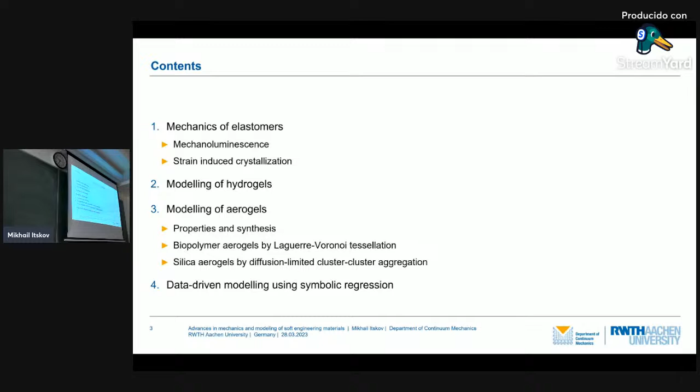The first topic is driven by my former PhD student, now postdoc, Khiêm Vu. First we would like to discuss the motivation for this topic, and the model we will discuss with you is physically based.

That's why we will start with the statistical, molecular foundation of rubber elasticity. Then we will see how we can go from the micro level to the macro level, and then we will look at some examples in rubber elasticity, the Mullins effect—very important for rubbers—and mechanoluminescence.

Here you see a typical stress-strain response of rubbers. There is a huge difference between first loading and second loading. This difference is exactly what we call the Mullins effect. This difference between loading and unloading is called hysteresis.

This is another important, interesting effect in rubbers, the Mullins effect, because if you look at the tangent line, the very first loading and the second loading differ very strongly. With the third load, the material becomes softer and softer with each next loading. This should be taken into account in the constitutive model.

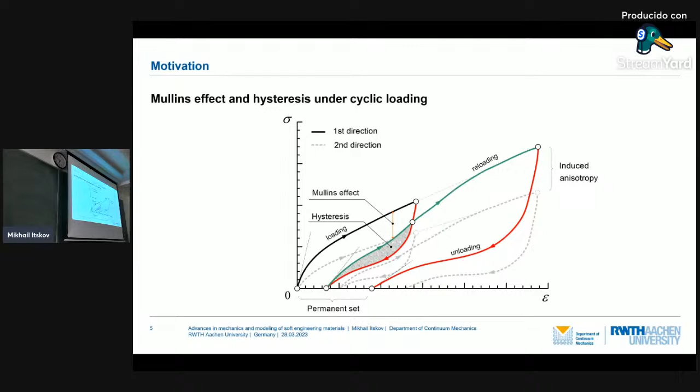Another important and difficult effect: if I change the direction of loading of rubber, load it, and change the direction, the response becomes softer. That means it is induced anisotropy. If you take a piece of rubber in your hand and apply a little load, it is already anisotropic after we go into first loading.

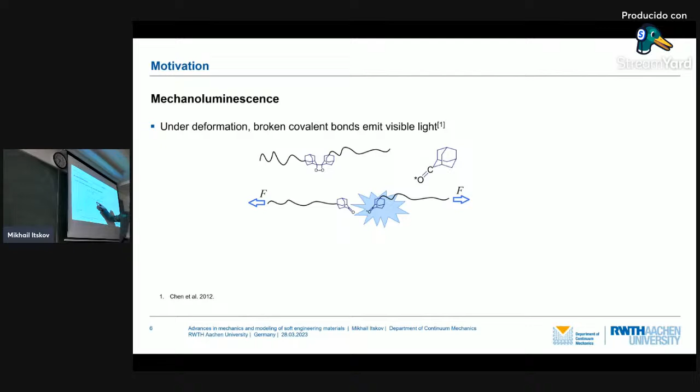We will also speak about mechanoluminescence in this context. Another important effect: if you add so-called dioxetane molecules to rubber, under loading these molecules break, and this breakage emits visible light. You see this piece of rubber which, under loading, begins to emit light. This way we can see how much damage is inside the rubber.

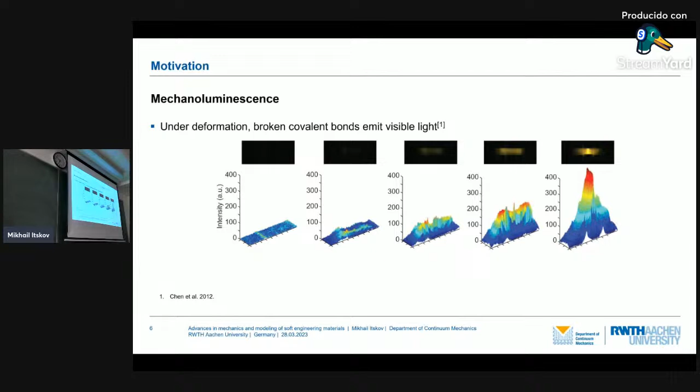Rubber parts are usually very cheap, O-rings for example, but if one breaks inside a motor or something else, the damage can be huge and very expensive. So this is the application of this effect. There are already many applications in dynamics, some optoelectronic, biomedical, luminescence devices, and so on. This is what we are going to discuss in this context.

I begin very shortly with the molecular statistical foundation. Here you see a typical polymer chain consisting of n segments, each of length L, and we work with the so-called freely joined chain model. It's like a chain which can rotate arbitrarily, also called phantom-like because it can cross itself, which is unphysical, but this model works very well.

We specify some direction, and this is the angle theta between the end-to-end direction of this chain and that direction. We also introduce the so-called relative end-to-end distance, which is the relation of this distance r to the length of one segment.

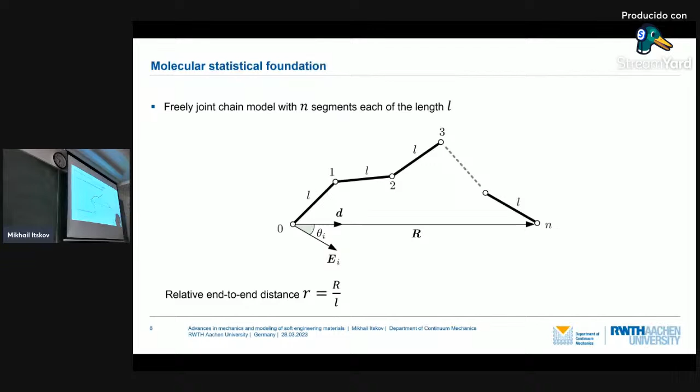According to the classical theory of this chain, the statistical distribution of this relative end-to-end distance depends on the number of segments, and it describes a very complex function, which is also discrete—it depends on the integer value—very difficult to use.

And here for longer chains, 24, 32, you also see with increasing end-to-end distance, this probability tends to 0, which is clear because if you try to extend this chain to the straight state, the probability is very, very low, almost 0, because the energy needed to reach that state is almost infinite, right? That is why it is described in this way.

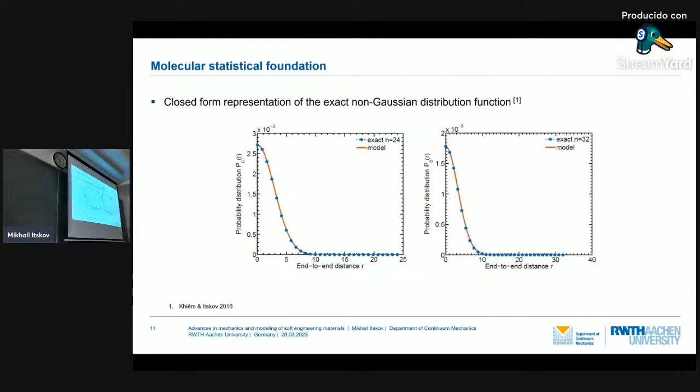Another problem is that such a chain is not alone. It is surrounded by other chains in a polymer or rubber, and this is taken into account by the so-called tube model. There is an additional probability function here, and we introduce according to this micro-stretch and micro-tube contraction. Here it is exactly the relation between this reference diameter of such an imaginary tube and the final diameter.

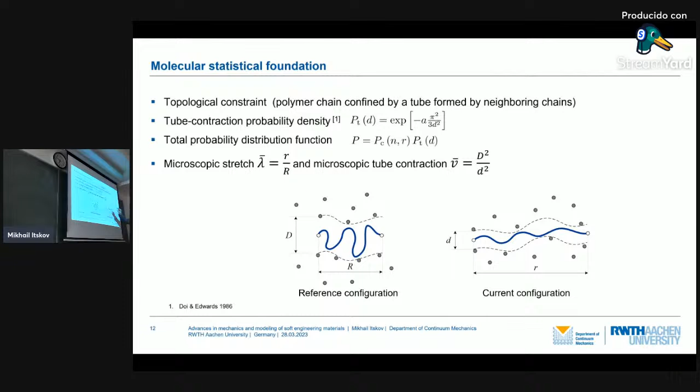And what to do with this probability? It appears here if we calculate the entropy of the system, which appears in the Helmholtz free energy. You see here, if we take this logarithm of this number of states, then from the product of these two probabilities we get the sum of these energies, and we see this entropic energy of the chain and this topological contribution.

Now the next question was how to come from this micro to macro level, and here we use the so-called analytical network averaging concept, which is based mostly on this known von Mises-Fisher distribution.

This is very nice because it's based on the exponential function. We see here again this angle between this direction and the preferred direction, and we can have many terms depending on the anisotropy of the material. For isotropy it's enough to have only 3 terms, and this zeta I is the concentration parameter for the distribution. If that is 0, it is isotropic.

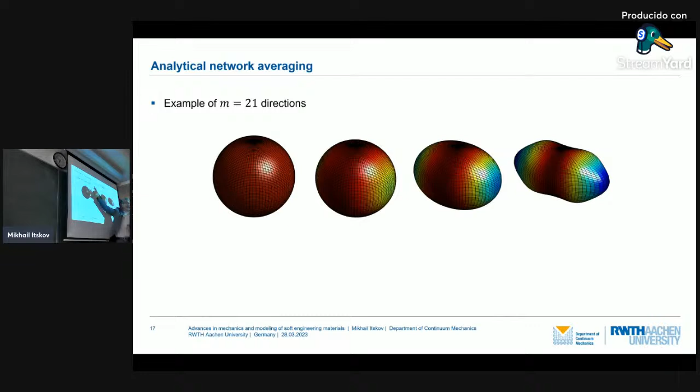It can be illustrated by a sphere, and with increasing concentration it becomes more and more anisotropic. You see here this distribution for only one direction, and here more complex for 21 directions, right? So any anisotropy can be described in this way, and the nice thing is it's based on exponential.

If integrated over all directions, you see we can express everything analytically in terms of the first here and second invariant of the right Cauchy-Green tensor. I hope you are familiar with this.

And Wi is this number of chains in this direction that can be expressed directly in terms of the concentration parameter. In the special case of isotropy, we have this classical relation where stretch is the square root of the first invariant divided by 3, and this tube contraction also can be expressed in terms of the second invariant, right? Let us look at the applications to rubber elasticity, for example.

There's this expression of the strain energy function in this case. We have two terms in everything. We have this shear modulus, so these two are parameters. We have another parameter, the average number of chains, as I mentioned already, and additionally we have here this stretch amplification exponent. So we have all four material constants.

And you see here we compare our model with this classical Treloar data and Kawabata data. In this Kawabata experiment, biaxial tension was applied with different relations between stretches, so in two directions we see different behavior. Using only these four material constants, we can nicely describe simultaneously these two experimental data sets very nicely, right?

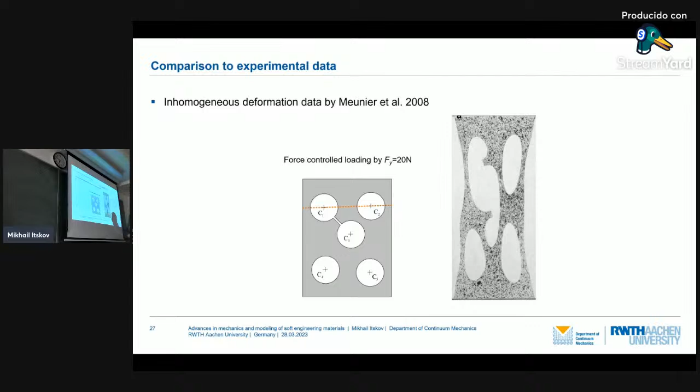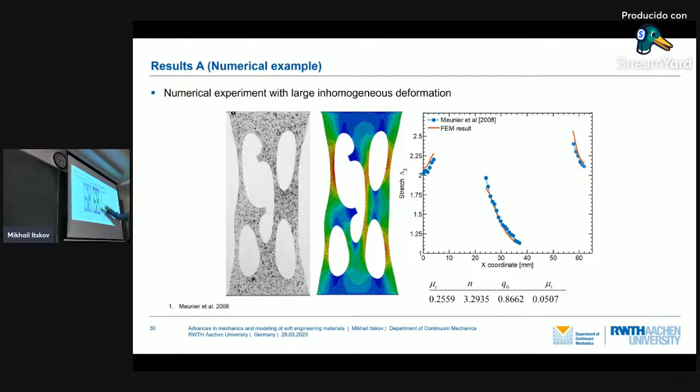Another example is an inhomogeneous case: a plate with five holes subjected to tension. Along this line, displacements were measured, and we fitted our model to this experimental data, for example the stress-strain curve under uniaxial and biaxial tension. Also shown here are constraint tension and constraint compression, and the agreement is very good even for this inhomogeneity. The displacements are also very well described along this line.

Let me now focus on the Mullins effect.

To describe these effects, we consider a network of polymer chains with aggregates inside, and decompose this network into parts. In the first part, we have chains which break - for example, in the case of dioxetane, they emit light, or simply detach from these aggregates once and forever.

In the second network, we consider hysteresis - these chains can attach again after unloading. We see here once more these effects illustrated.

Here we see again the dioxetane molecules which emit light when broken. And here you see: if the distance between the two aggregates becomes longer than the contour length of this molecule, there is a gap.

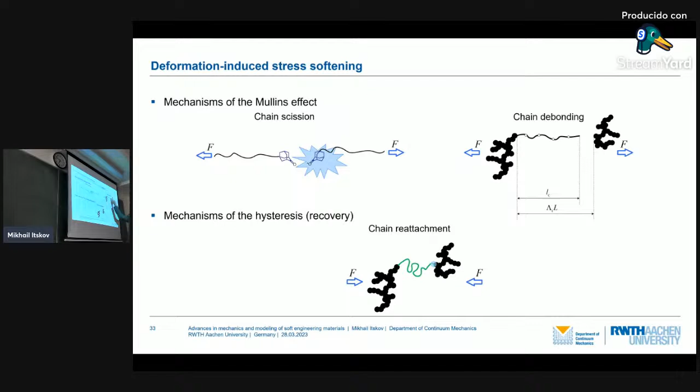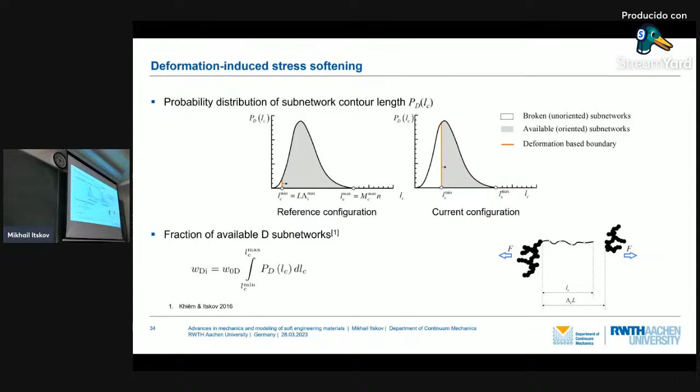To take this into account, we consider a distribution of chain lengths. You see here the distribution, and with increasing distance, the boundary between broken and unbroken chains moves. The number of broken chains increases, the number of active chains decreases, and to calculate this number we integrate over the gray area, calculating this gap and the number of active chains available. On this basis, the model is formulated.

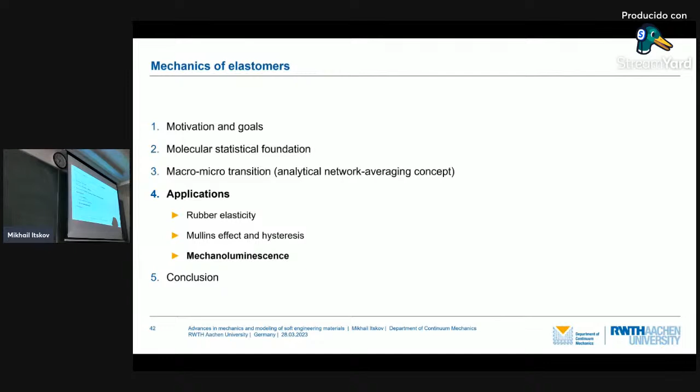Last example here is this mechanoluminescence I already mentioned. To model it, we consider a void inside the rubber with a dioxetane molecule. We assume, for mathematical simplicity, that this void has a spherical form surrounded by these chains, and it increases with loading. When it reaches a critical diameter, the molecule breaks and emits light - this is the assumption.

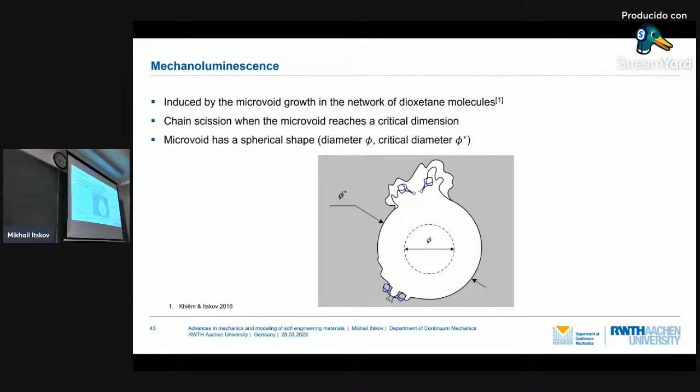Then, similar to the well-known Griffith theory, we calculate the energy of this void as the difference between surface energy and bulk energy of the rubber inside, which is released when this void appears. We maximize this energy, and in this way get the critical diameter and energy barrier. Inserting this energy into the Boltzmann factor, we can calculate the fraction of available chains.

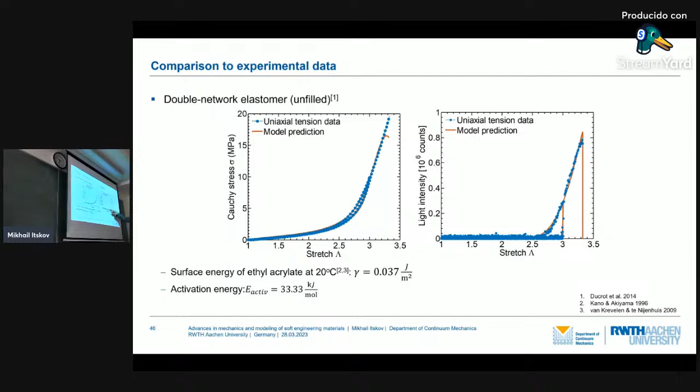Here is another elastomer. These are results from the group of Professor Sijbesma from the Netherlands. They did this experiment with dioxetane and shared these results with us. You see here rather good agreement with this experimental data on light intensity. Interestingly, the number of dioxetane molecules is also very well predicted in our model. The only deviation we have is with the activation energies.

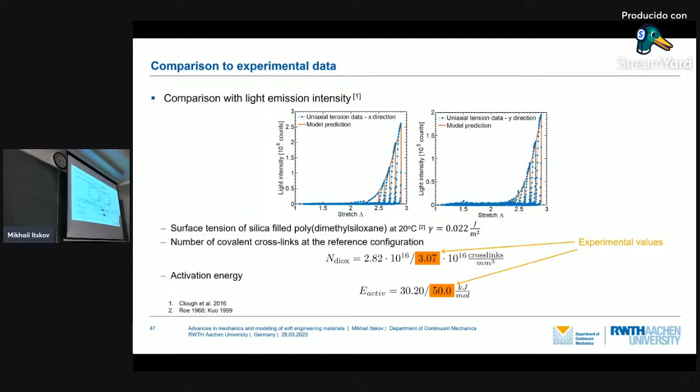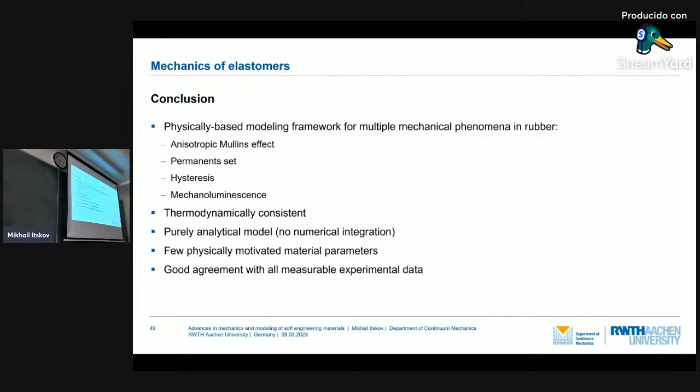Let me summarize this part of my talk. We have presented a physically based model which is able, in one framework, to consider many different effects in rubber: anisotropic Mullins effect, permanent set, hysteresis, mechanoluminescence. The model is thermodynamically consistent, and there is no need for numerical integration to take into account this anisotropy because of analytical integration. We have a very small number of material parameters — for example, in the case of elastic behavior it's only 4 — and we have good agreement with the experimental data.

Another topic, also considered by Khiêm Vu, in cooperation with Professor Le Cam from the Institute of Physics, University of Rennes in France. He did very nice calorimetry experiments for us, and by means of this calorimetry we will be able to describe strain-induced crystallization. It's very interesting to see where small crystals appear in rubber only due to stretching. There is also so-called cold crystallization, when crystals appear as you decrease temperature. Here we consider strain-induced crystallization a very important effect for industrial application. I will talk about that a little bit.

I will talk about the thermodynamic framework again, about this macro transition, how these crystals appear. We will speak about the kinetics of this crystallization and a little bit about numerical results.

Why is this crystallization so important? If you look at the stretch diagram of crystallizing rubber, we see at the beginning small softening, but then very strong stiffening. This is also important. Another important thing is that these crystals have a nice property: they can retard or even stop propagation of cracks in rubber, which is very important for heavy load applications, for example truck tires and so on.

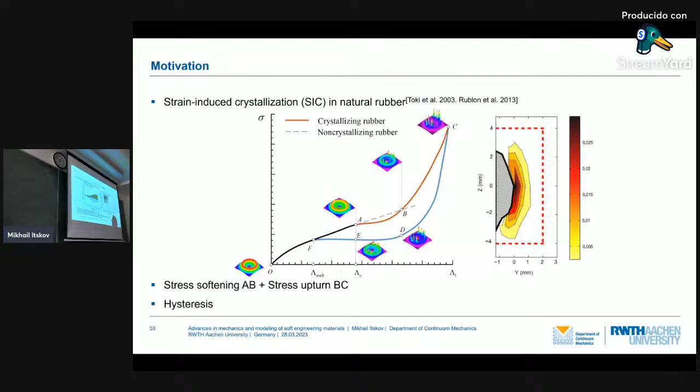But around the crack tip, we have a concentration of strains, and very high strains can appear there. Exactly there, crystals can appear and retard or even stop, as I mentioned, the propagation of cracks. This is exactly what I mentioned with this thermography — in this way we can measure the so-called heat source.

If we look, we see that at rather small cycling stretches this diagram is rather symmetric — the amount of heat produced is equal to the amount of heat consumed by the melting of this crystal. At higher stretches we have an asymmetry, and this is due to the fact that crystallization is a phase transition and for this reason exothermic. Due to the fact that there is no dissipation here, we believe that hysteresis at large stretches in rubbers is not due to dissipation, but mostly due to strain-induced crystallization.

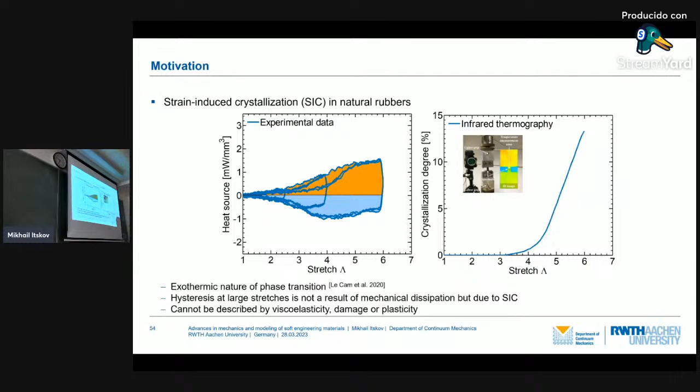And that is why it cannot be described by classical models like viscoelasticity, damage, or plasticity. There are many models that try to describe crystallization by means of dissipative models like plasticity or viscoelasticity. We also tried to do this, and we described crystallization in our recent paper, but calorimetric effects were not discussed, and the non-adiabatic condition was not considered.

Now let us discuss the kinetics of this crystallization. First of all, if we apply some tension to rubber, these polymer chains under tension come very, very close together. When they come close together, some crystals appear because they have a very small diameter. Under unloading, these crystals begin to melt, but around this crystal other crystals appear because these polymer chains begin to form such zigzag structures, creating a second type of crystallization.

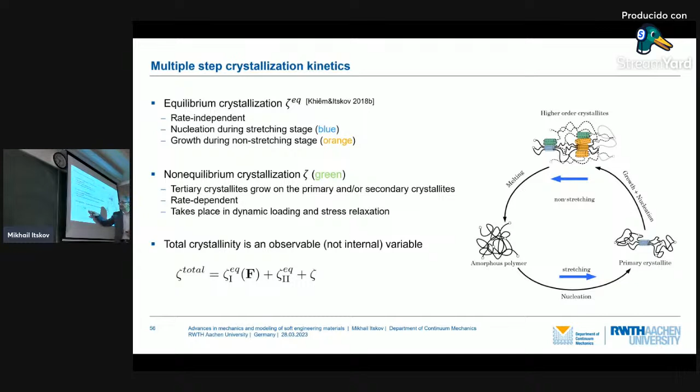The third type of crystallization we see is so-called non-equilibrium crystallization. It doesn't depend on stretch — simply, if there are already some crystals, new crystals appear or disappear around them, and this is what we are going to discuss in this model. We will consider, as a kind of motion, these two types of crystallization. The idea of this study is to integrate thermography to take it into account in computational modeling. Again, we will use statistical mechanics and irreversible thermodynamics.

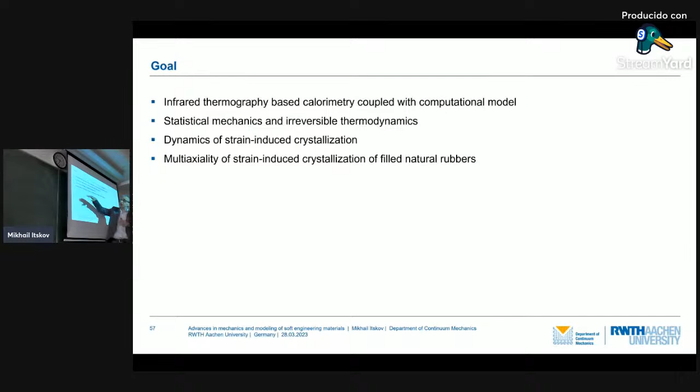We consider also dynamics of strain-induced crystallization, and we try to consider not only uniaxial tension but also multi-axial deformation, and how strain-induced crystallization develops in this case. We begin with the thermodynamic basis.

Again, we see this Helmholtz free energy consisting of two parts: the internal energy and the entropic part. This entropy depends not only on the deformation gradient, but also on some internal variables, and here we see this second, third type of crystallization. They are not measurable, and stretches, maximal stretches in different directions, describe this damage or viscoelasticity.

The stress of such a material, as usual, can be obtained as a derivative of the strain energy function with respect to the deformation gradient. For crystallization, this thermic part is very important. It appears in this internal energy, but also appears in the first law of thermodynamics.

The nice thing is that this part can be measured, meaning we can obtain this term, and in this term, this part can be calculated. Finally we can separate this amount of energy, or power, which is proportional to the total crystallization. If we measure temperature and heat source on the surface of the specimen, we can finally get, through this calculation, the evolution of this crystallinity.

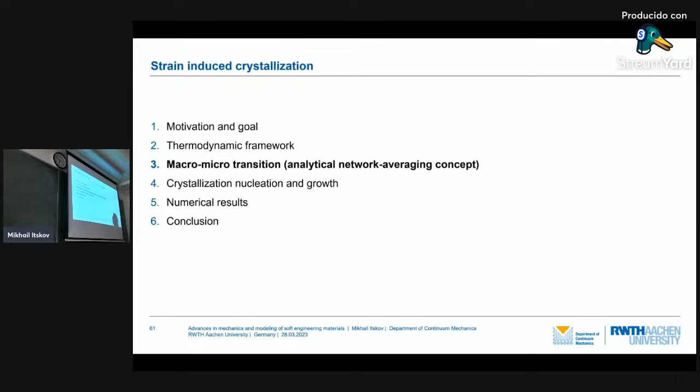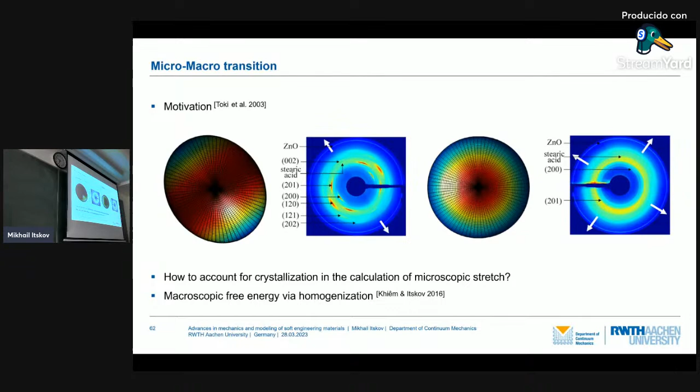The only thing we have to do is again consider how this crystallization changes our analytic averaging concept. The idea is to use again this X-ray diffraction pattern and try to mimic with our function this distribution, and this can be done also by means of the concentration parameter I mentioned already.

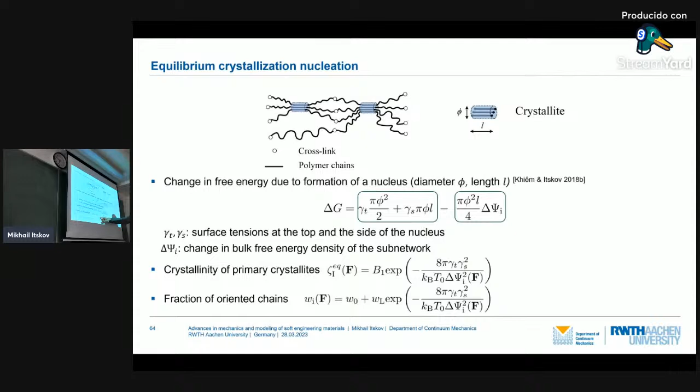The idea is also very similar to the Griffith theory. If you consider crystallization, you see this first type of crystallization. These crystals appear when molecules come closer to each other. We assume for mathematical simplicity a cylindrical form with diameter phi and length L, and use these two terms: surface energy minus the bulk energy of the rubber released in this volume. Using maximization we can get the critical values of the diameter and length, and based on this we can get exactly the concentration parameter and the number of oriented chains due to this crystallization.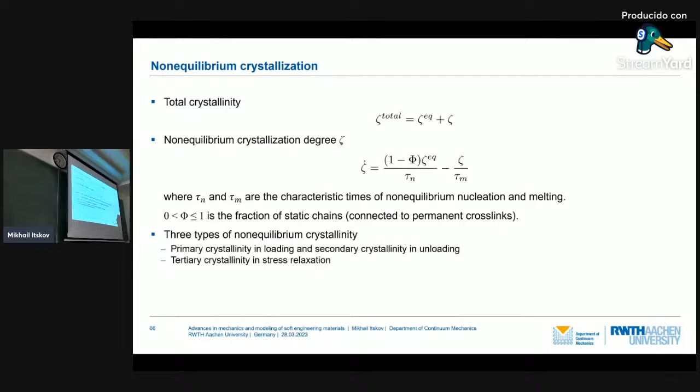The third, non-equilibrium crystallinity, as I mentioned, doesn't depend on stretch. We simply assume it depends on the characteristic times of crystallization and melting. If you simply keep the rubber unstretched or under constant stretch, some crystals slowly begin to melt, and we assume this crystallization term is negative, and in this way we describe the evolution of this crystallinity. Let us look at some results.

You see here on the right hand side this experimental device in France, in Rennes, of Professor Le Cam, for uniaxial tension and later on with biaxial tension. First, what we do is fit our model to experimental cyclic tests under uniaxial tension with these relaxation times. This is very important in order to describe these parameters of this tertiary crystallization, and you see here we get very good agreement with experiment.

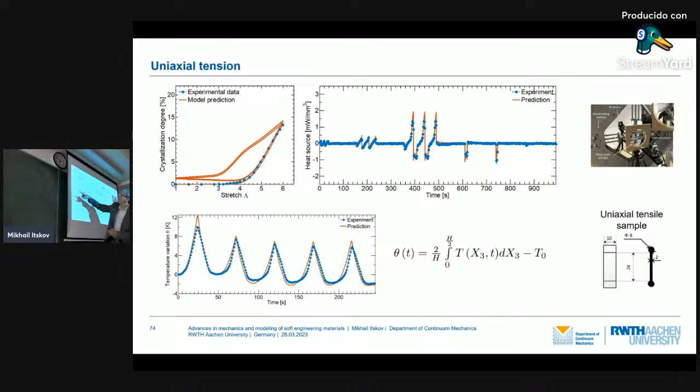This agreement is obtained automatically, for example, for this cyclic test with stepwise increasing amplitude, and also with preconditioning. The only problem is in the description of the heat source: we have rather good agreement at middle values of stretches, but at very high stretches our model overestimates the heat source. We believe this is due to the fact that we don't consider the internal energy of the polymer segment. Temperature evolution is rather well described, and crystallization degree also shows good agreement with results.

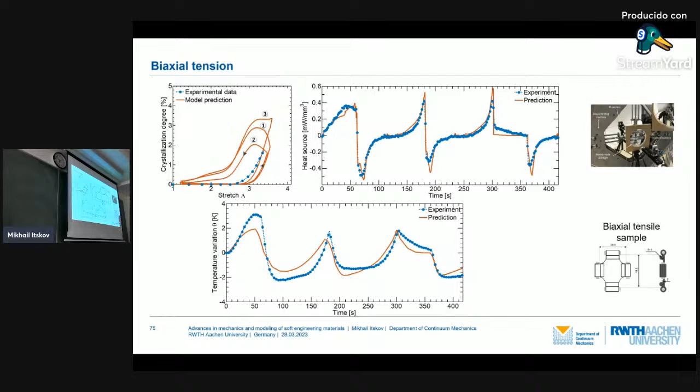Finally, these are the results for biaxial tension. We see the sample for biaxial tension simultaneously stretched in both directions, and the results are rather good, for example for the crystallization degree. An interesting message here for biaxial tension: we observe that crystallization appears earlier and at lower stretches compared to uniaxial tension.

Short summary of these results. We presented here a non-adiabatic thermodynamic framework of strain-induced crystallization. The model was coupled with infrared thermography in order to measure the heat source. We obtained very good agreement with experimental data, and we observed that under multi-axial loading, for example, the crystallization appears earlier and with higher intensity. We believe this is the first step towards describing strain-induced crystallization in a cheaper and more accessible way compared to X-ray diffraction, which I mentioned at the beginning.

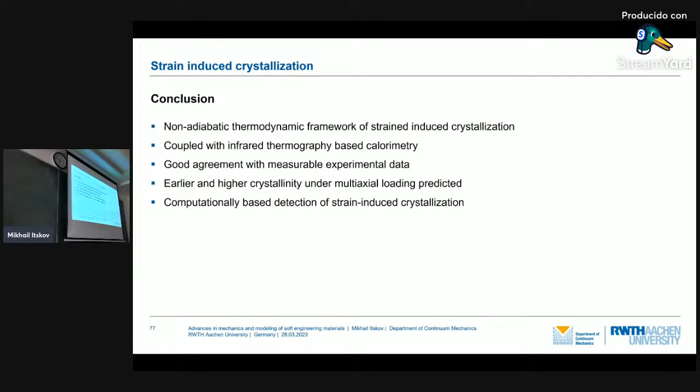Very shortly about hydrogels. This topic is also driven by Khiêm Vu. We use almost the same model here with hydrogels. For many years the problem was that if you take this hydrogel in your hand, it's like a yogurt or maybe a pudding - it destroys very fast, because the polymer chains are broken.

This was the idea from Professor Gong from Japan. They added a second network into the first network, which stabilized it, and then this so-called double network hydrogel appeared with very nice mechanical properties.

Hydrogel - why do they call it hydrogel? Because it consists of much water. The advantage is that they have very good biocompatibility, are environmentally friendly, and have anti-biofouling behavior, and many other important properties including biodegradability. They have many applications in tissue engineering, soft robotics, drug delivery, regenerative medicine, and artificial skin is also made of hydrogel - many applications.

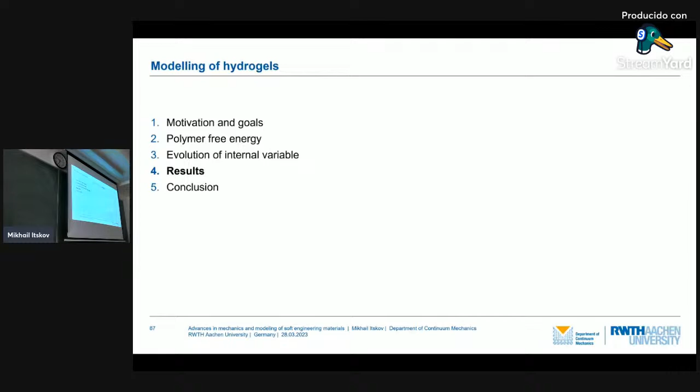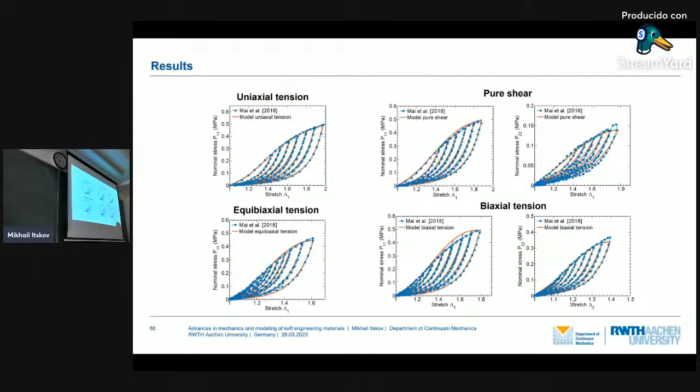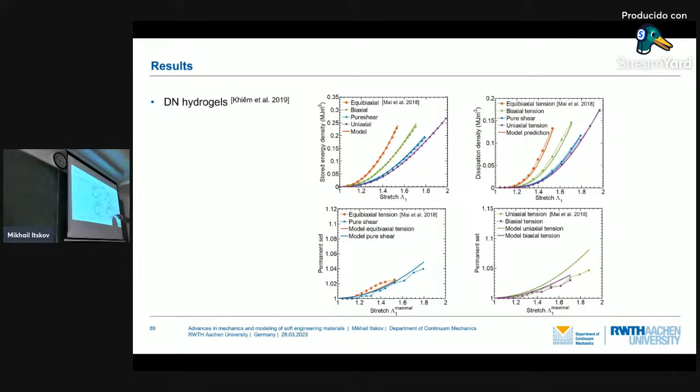You see here the comparison to experimental data, with rather good agreement under uniaxial tension, equibiaxial tension, and pure shear biaxial tension. Also here are other results for double network hydrogels, for the stored energy, dissipated energy density, and permanent set. The agreement is rather good.

Some results of the study: we proposed a micromechanically based model for covalent cross-link double network hydrogels, and the challenge was to take into account this cross damage effect, as already mentioned, and we obtained good agreement to explain it.

The next topic I would like to discuss with you is aerogels, which I already mentioned. Here we collaborate with the German Aerospace Center in Cologne. These materials are very light, and for this reason very attractive for aeronautic applications. We work together with my former PhD student, now Dr. Ameya Rege, who has a small department in Cologne dealing with aerogels - he says it's the largest department in Germany dealing only with aerogels.

This is my main topic. First, I would like to discuss with you the interesting properties of aerogels and how they can be synthesized. Then we focus on two different types of aerogel, biopolymer and silica, and we use different methods to model these aerogels - this is what we're going to discuss.

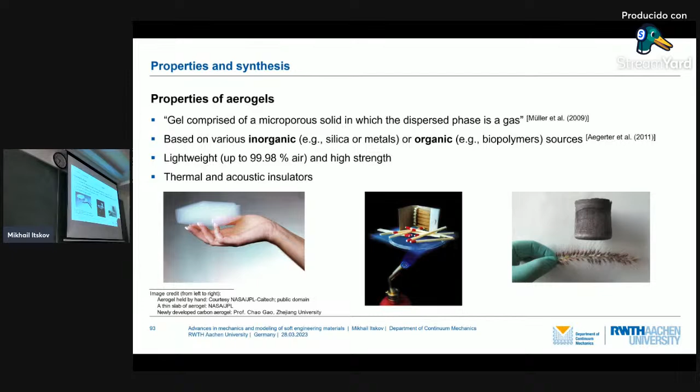How can these aerogels be synthesized? The idea is that we have a sol with some particles or fibers, and then such a gelation process takes place under higher temperatures. These particles begin to form such a structure, but still we have a lot of fluid.

So-called supercritical drying is applied. If you apply usual drying, the structure can be deformed or destroyed. That is why a special kind of drying is applied under a special combination of pressures and temperatures, called supercritical drying. Then we have such a structure with air, open cells with air inside.

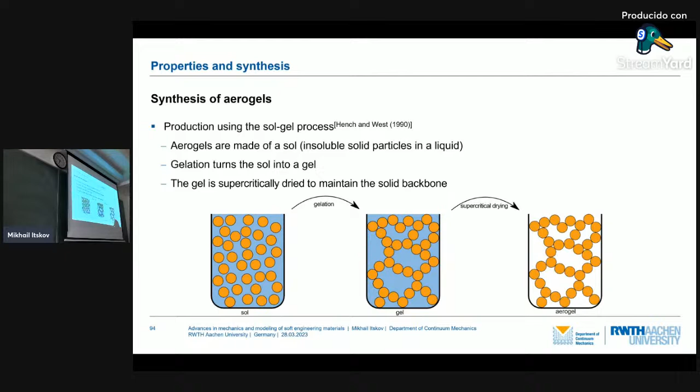99.98% of air. This first topic we are dealing with is biopolymer aerogels, studied by my PhD student, Rajesh Chandrasekaran.

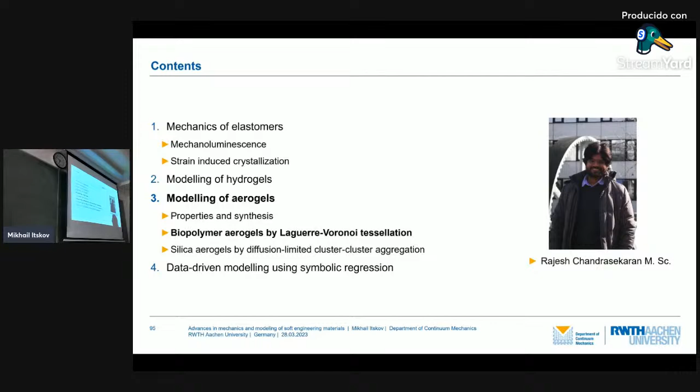The idea I will discuss with you is to try to mimic the structure of this biopolymer aerogel by so-called Voronoi tessellation, and another version, the Laguerre-Voronoi tessellation, which I will also discuss.

Let us speak a little bit about these biopolymer aerogels. They are based on so-called polysaccharides, for example starch, cellulose, or chitin, and they are extremely light.

120 grams per cubic meter. Just imagine, a cubic meter, and the weight is 120 grams. So you can take it with a small finger and hold it, right?

Such a huge cube. They have very low thermal conductivity, and the problem for the model we'll discuss with you is the very heterogeneous pore size distribution. We have different pores here, large pores, small pores.

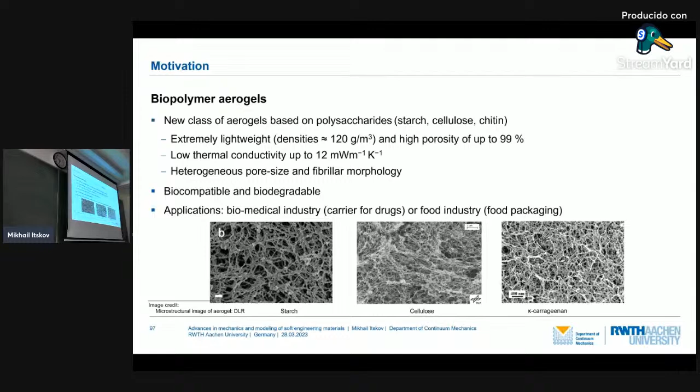Also here we see examples of aerogels made of starch, cellulose, and kappa carrageenan. If we speak about mechanical behavior of these aerogels, of course it depends on the microstructure.

The idea is to describe this microstructure in a way that allows us to tailor its mechanical properties based on different parameters. Which parameters can we vary here? Of course, solid fraction, Young's modulus of fibers or particles, and the pore size distribution.

The challenges here, as I mentioned, are to take into account the highly irregular shapes of the cells and extremely small pore size, and we are going to develop such a modeling technique.

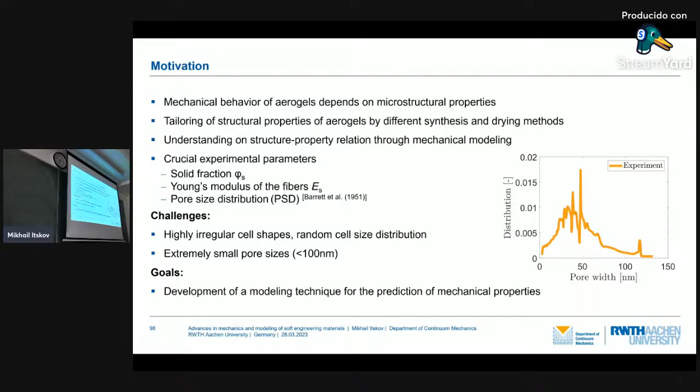It is based on this Voronoi tessellation. What is this Voronoi tessellation and how does it work?

However, the idea is to make it a little bit more versatile, so we apply some weights for these cells. This can be done by means of the so-called Laguerre-Voronoi tessellation.

In this case, we have more control over the cell size, and the problem was only how to choose this weight, how large the cells should be.

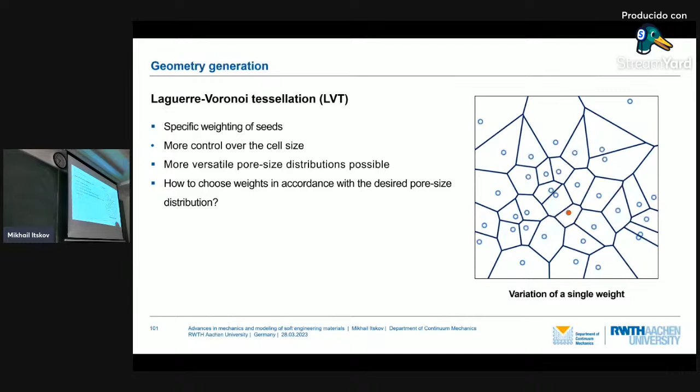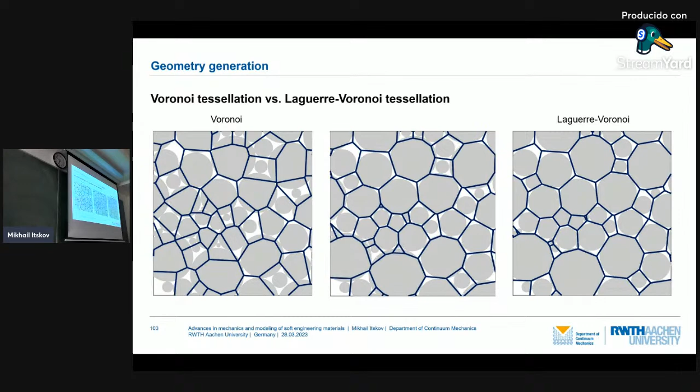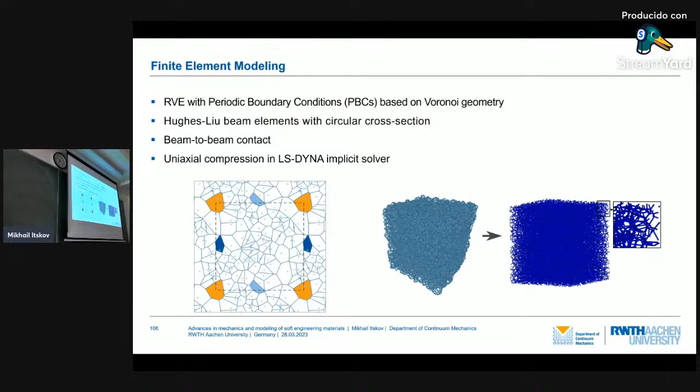Then we apply beam elements for these connections. Beam contact, and also friction between these beams, is taken into account, and everything is calculated using an implicit solver.

The whole procedure, the results you can see here. For example, for the elastic model, you see here good agreement for stress-strain curves for different amounts of particles, and also good agreement for the so-called power law.

This is a typical five minutes. Ten minutes. Yeah, because we have, yeah.

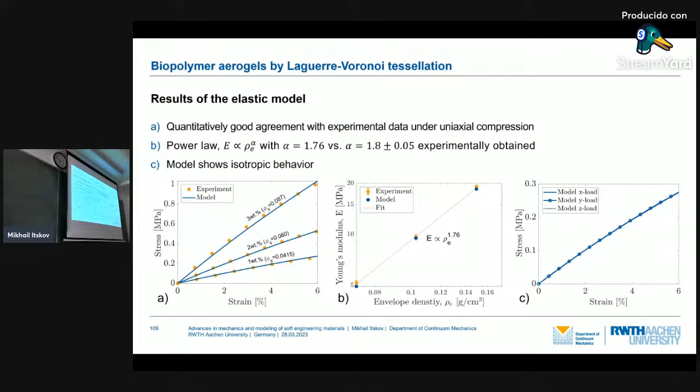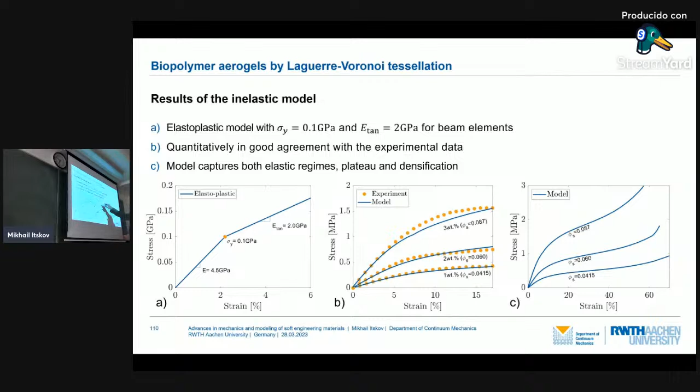Power law describes the dependence of the Young's modulus on the density. Inelastic models are also rather good—we assume here a bilinear strain response, and all these important effects in aerogels are described: the elastic region, plateau, and densification.

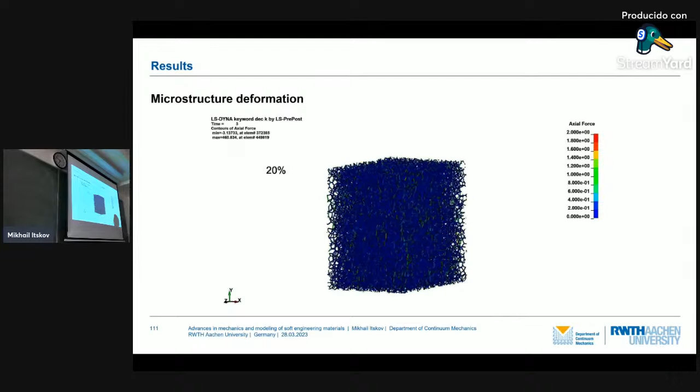Here's how it works in this finite element simulation. The whole structure is compressed up to 70%, and as we mentioned, we have beams in contact with each other.

I skipped some slides. This is the conclusion to this topic.

You see here the spheres inside of these Voronoi cells. We try to describe this microstructure by sphere packing and Laguerre tessellations. We obtain good agreement with experimental data, also for the strain response—namely, this plateau regime and densification are rather well described under compression.

Permanent set and hysteresis are also described, and we can also describe the failure of the fiber network under tension. The nice thing is that in this case the agreement is obtained without any fitting—these parameters are obtained directly from the pore size distribution. We believe this procedure can be applied also to other open cell materials, not only to aerogels.

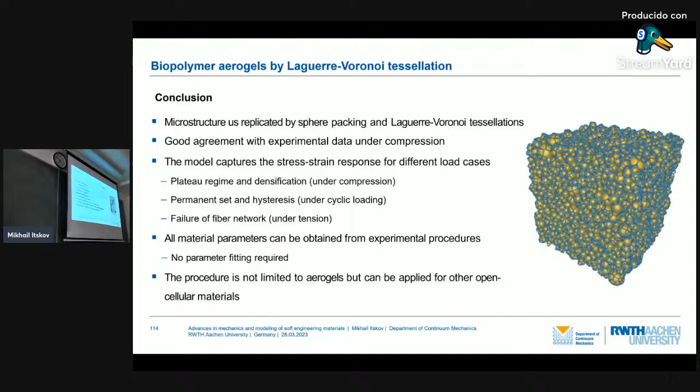Another topic, very fast since we have less time, was studied by another PhD student, Rasul Abdusalamov. Here we deal with a different kind of aerogel, silica aerogels, and we use another procedure called diffusion limited cluster aggregation.

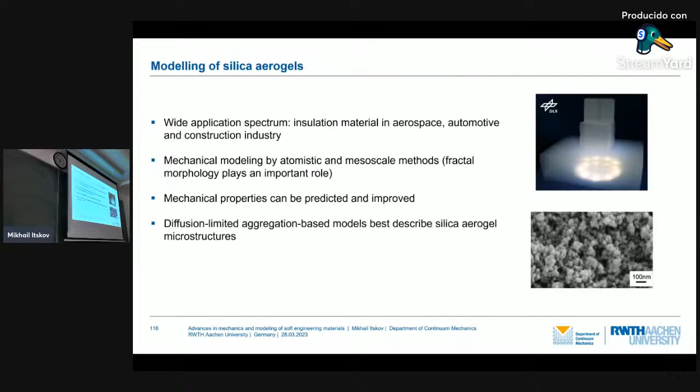Only a few words about that—I'll go fast through the slides. For silica aerogels, the idea is to use diffusion limited cluster aggregation. We place some seeds and some walkers, and these walkers randomly walk around the seeds. When they come close, they connect and begin to form aggregates. That's the idea of this model.

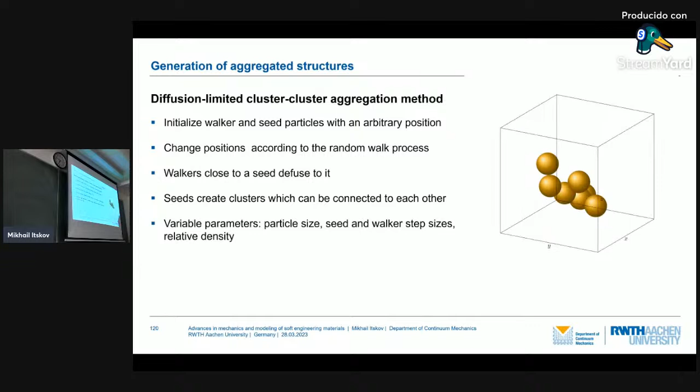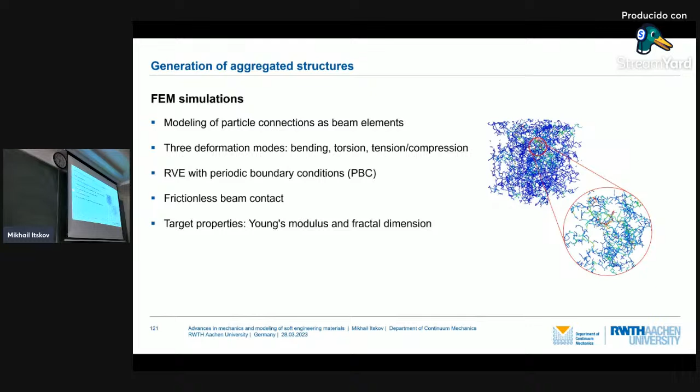We see here the results of this model. We also apply finite elements with representative volume elements and periodic boundary conditions, and here too we have rather good agreement, for example again for this power law expression.

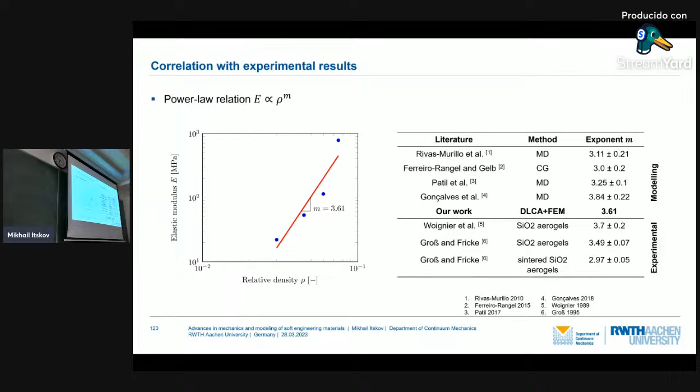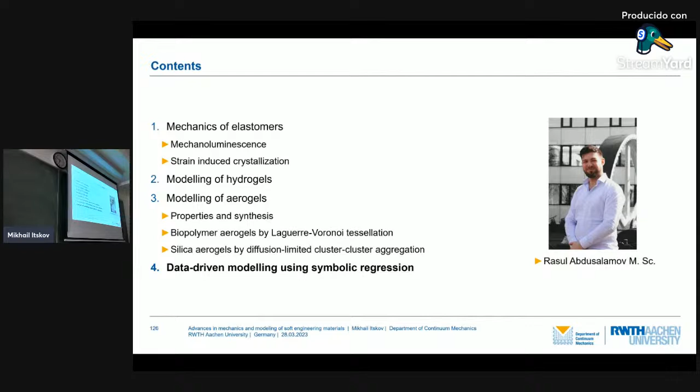For the last topic, in the last five minutes, I'd like to discuss data-driven modeling based on symbolic regression. I'll briefly discuss symbolic regression—this topic is also studied by Rasul. The idea is that when we construct a constitutive model, for example as experts,

we create some functions and terms, and in this way we try to get good agreement with the experiment—we do it ourselves. If we can do that, why can't it be done by a computer? That's the idea, and we decided to use so-called symbolic regression.

I'll briefly give you an idea about it. First, the motivation came from usual data-driven modeling. If you apply neural networks, for example, you finally get a very complex structure. You get good agreement with experimental data, but the function you get is not interpretable, and it's very difficult to implement into the finite element code—it can be very, very complex.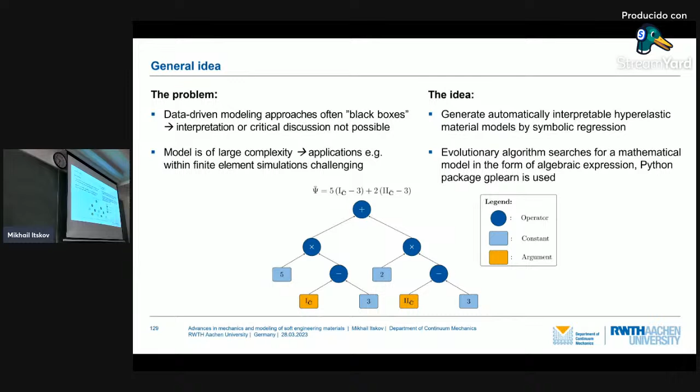This task can be given to a computer, and a genetic evolution algorithm can be applied here. You see how it happens: we have a task to find such a function, using some simple operations—power law, multiplication.

The computer starts and improves this behavior. The criterion is fitness, but not only fitness—also simplicity. The optimization criteria are simplicity of the expression and precision. We begin with a random population of basic allowed algebraic operations like product, square root, cosine, sine, and so on.

Then a selection algorithm is applied—rather developed crossover, hoist mutation, point mutation, subtree mutation—I won't go into details. In the end we get good agreement. The problem is we also have to compare with experimental data not the function itself, but its derivative.

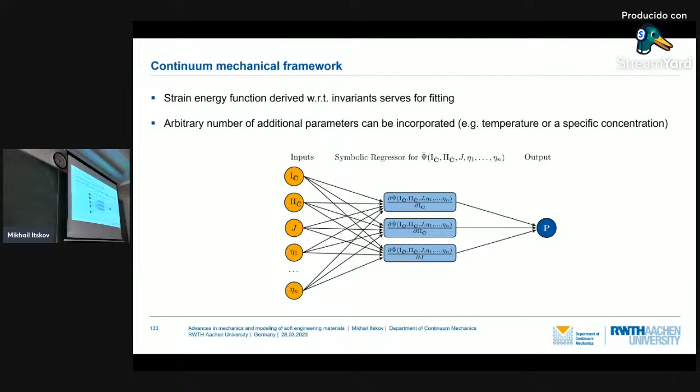That is why we have to calculate this derivative automatically, and after that we get the stress, which can be compared with experimental data. This way we can get the so-called fitness of this model.

Some examples here: for this generalized Mooney-Rivlin model with 5 terms, you see the fitness improves and decreases very fast, and we have good agreement with experiment using this original model, for 3 sets of material constants.

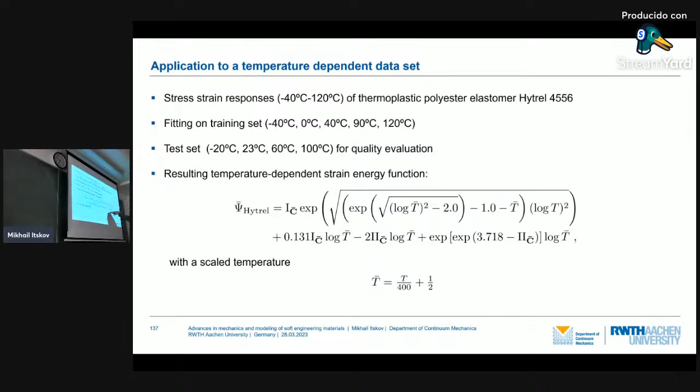Another idea was to model not only hyperelastic material, but also include other parameters, for example temperature. We got from the internet a set of experimental data of a polymer for different temperatures between -40 and 120 degrees. Some data was used for fitting, and other curves were used for testing, and we got a very strange but still interpretable function.

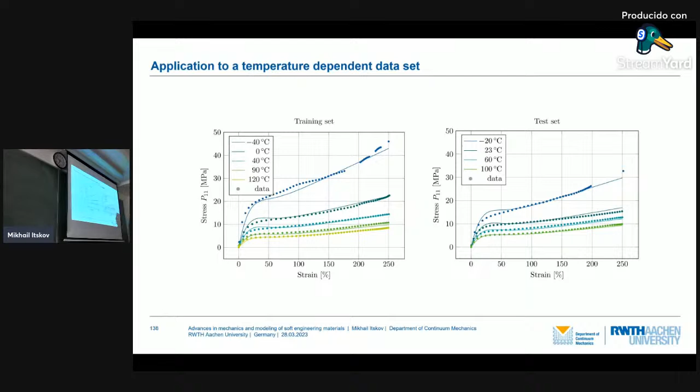This is the training set, and we have rather good agreement here. This is the test data, which was not seen by the model. It tries to fit, except maybe for some parts, but it still showed very good agreement with the experimental data.

So let me summarize this part of the talk. We have shown that we can nicely create this hyperelastic material model by symbolic regression. The important thing is that the continuum framework is preserved, so we can easily integrate it into commercial finite element packages. We finally get a physically interpretable, data-driven model, and we are going to extend it to other parameters, not only hyperelastic ones. Thank you very much for your attention.

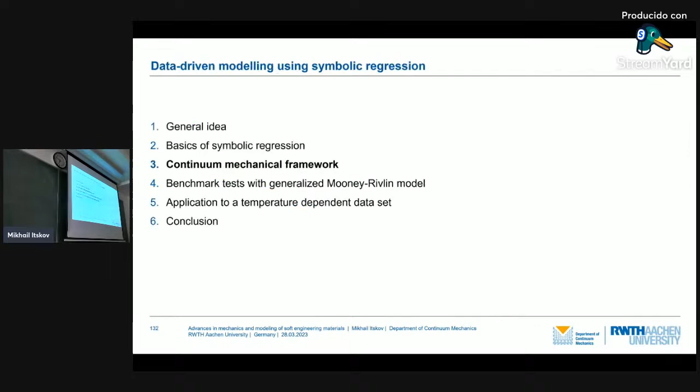If you have a complex case of anisotropy, you can take many terms. It depends—you can take one term or many terms. For isotropic materials, usually it's enough to have three. But when we deal with rubber, this induced anisotropy appears, and many terms are needed.